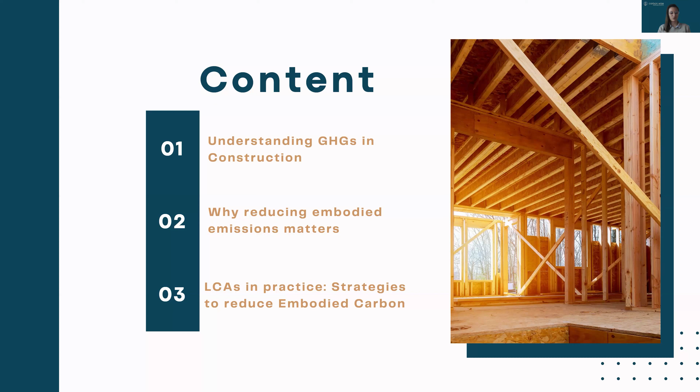So as you probably know, or have heard before, the construction industry accounts for about 40% of global greenhouse gas emissions. So you probably have seen a pie like this before, in some shape or form, and roughly 28% of those emissions come from operational emissions, so energy used in buildings, and 11% from embodied emissions, so that is materials, construction, and end-of-life process.

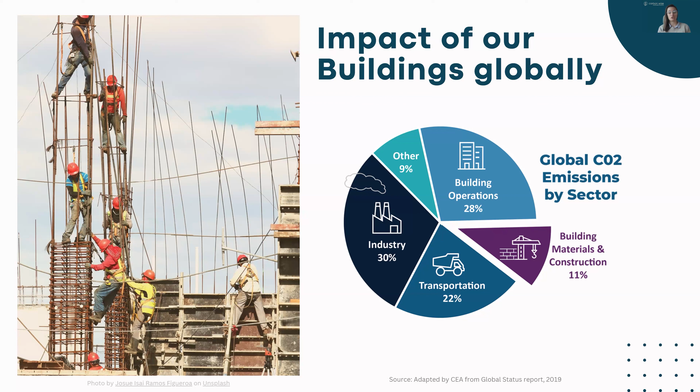Materials like concrete, steel, and insulation are major contributors to embodied emissions. And really, without intervention right now, emissions in the construction sector could double by 2060. So it is a good time for reducing both operational and embodied emissions. And it's very critical that we do this now if we are to meet our global climate targets.

So, like I was saying, there are different types of emissions throughout the life cycle of a building. The top 3 sources of operational emissions are fossil fuel space heating, domestic hot water heating, and cooking appliances. And that's basically during the building's operation, when fossil fuels are burned to heat the home, generate hot water, and cook. And those are called operational emissions. And that's where a lot of the energy efficiency policies have been focused over the past few years.

But another type of emissions that is often forgotten is embodied emissions. And they are associated with all the manufacturing, transportation, decommissioning of materials. And the top 3 sources of embodied emissions are concrete, steel, and petroleum-based insulation. We'll get a little bit more into this, but as a rule of thumb, any material that takes a lot of energy and effort to make will have high embodied emissions.

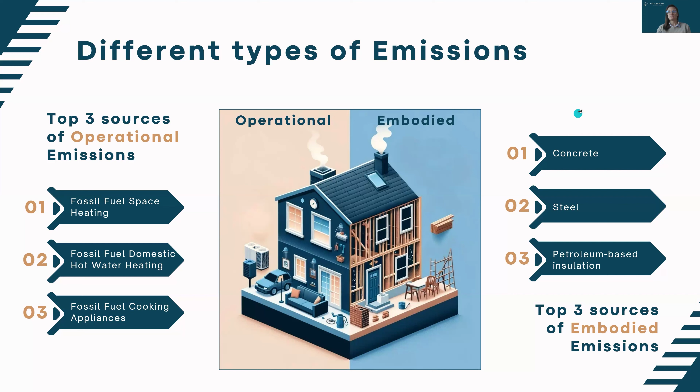So operational emissions are ongoing and can be reduced through energy efficient design and technology. But the important thing to know is that most of embodied emissions are emitted even before the owners move in, at the time of construction. And so those can be addressed through design strategies that we'll get into, sustainable material choices, and circular practices. We'll talk a bit more about that.

First, I like to always clarify the terminology embodied carbon, embodied emissions. I use them interchangeably, but I prefer embodied emissions because carbon could be a bit misleading. We are not only talking about carbon, we are talking about different greenhouse gas emissions. And the term embodied is really embodied in the processes. So embodied emissions are the greenhouse gas emissions associated with the materials and processes involved in the construction of a building or infrastructure throughout its entire life cycle.

So that includes emissions from extracting raw materials, manufacturing building products, transporting those materials to sites, the construction process itself, and then also the end of life, deconstruction and recycling of these materials. So what happens at the end of life of a building? Is the home getting demolished? Does everything just end up in the landfill? Does it get recycled, reused? And all of those streams have different emissions associated with them.

So you can see here that operational emissions in blue represent only one stage of the life cycle emissions. So historically, operational emissions have been really high, and that's why a lot of the policies have been focused on reducing operational emissions. And I think it makes sense, because operational emissions are more visible, because every time you turn on your furnace, you'll emit greenhouse gas emissions, for example.

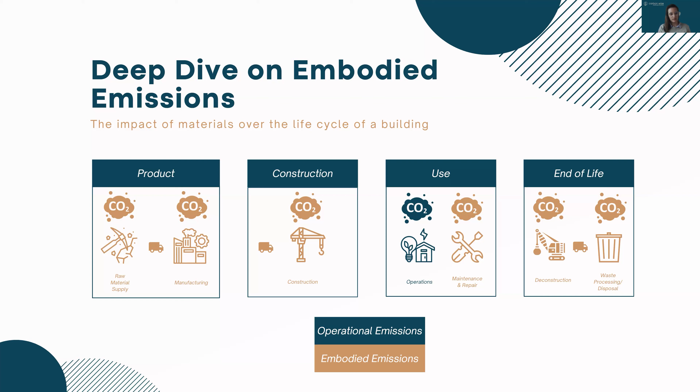But it's a bit less intuitive with embodied emissions because a lot of the emissions associated with the materials happen before or during construction. So once the homeowners have moved in, they don't really realize what went into building their house. So it's a bit harder for homeowners to grasp and to understand what are the choices that we can make that could have a better impact.

This is another graph to show the emissions quantified over time. So like I was saying, the upfront embodied emissions or embodied carbon are most of the entire life cycle embodied emissions, about 70 to 80%. So at completion of the house, a lot of greenhouse gas emissions will have already been emitted. And then come the operational emissions in blue, but those are now very low, especially in passive houses where we have reduced the energy demand, we are electrifying, we are using very little energy, and this energy is clean. So operational emissions end up being very, very low, which makes embodied carbon a bigger portion of the pie.

So addressing embodied emissions is essential right now when we want to achieve overall carbon reductions in the construction sector, because they have often been overlooked, but now we are getting a lot better at quantifying them through life cycle assessments. And I always say we can't reduce what we can't measure. So now that we get a better understanding of what they are, how to reduce them, and we can quantify them, it becomes easier to make the right decisions.

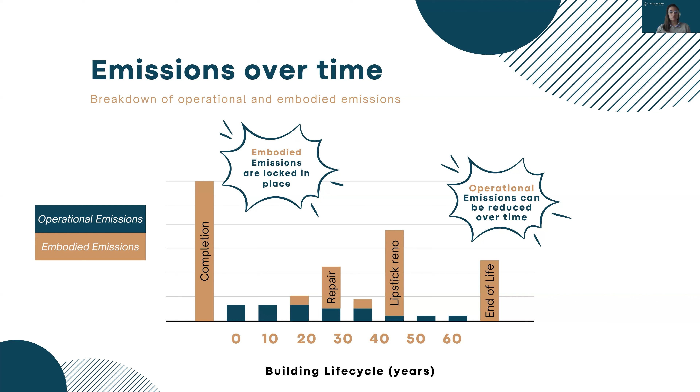And that's another way to visualize the entire life cycle of a building, with upfront embodied carbon, as you can see on the left side. So the A, production and construction stage, that's upfront embodied carbon, which is usually the highest. And then there's the B, use stage on the top right, and then the end of life C stage, on the bottom right. And I put in some key terms here. When we think about embodied emissions, we also want to think about circular economy.

It's linked, same as resiliency, in my opinion. We want to just build better, and that means a lot of different things, but including the words circular economy, material efficiency, waste reduction in the efforts towards reducing embodied carbon is important.

A lot of homes that we are seeing, for example, right now in Vancouver are being demolished for making space for bigger multi-units. And that's a good example of the end of life stage, where we can look at more circular principles and reuse those homes either as is, by just relocating the home, or deconstructing the home, taking the home apart, reusing some of those materials, and make sure that we reuse them in the next build, or we exchange them on the secondhand market.

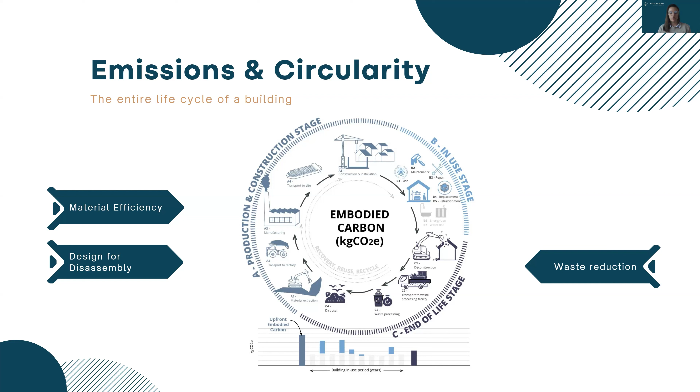So why do embodied emissions matter? I often say that it's a big elephant in the room. So first, because it becomes an increasing portion of emissions. As I was saying, operational emissions are going down globally, thanks to energy code, low emission grids, electrification, and the passive house concepts. We make our homes just much more efficient now than we used to 50 years ago. So operational emissions are going down.

But that could mean that we are increasing our embodied emissions, because we are building more infrastructure and materials, such as a new dam. If we are going to electrify all our buildings, we might need more. In BC, this is the case. Electricity comes from hydro. So we might need more infrastructure, more materials, and that might mean, though it's not necessarily the case, high carbon materials. And we're going to get a little bit more into that, and you'll probably learn a lot more about bio-based materials on Friday as well. So those are high carbon materials, often used in high performance homes now, but they don't have to be.

And then increased use of refrigerants. This is a topic that is becoming more and more front and center with the use of heat pumps. We are far from being experts on HVAC, but we do use more refrigerants, and there is a risk of leakage, and I'll get a little bit more into that.

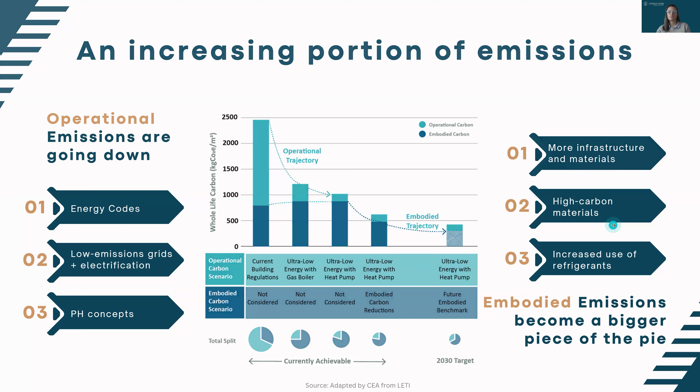Thicker walls might mean increased embodied emissions. And again, when we talk about this balance, that's where it comes in, because we do want to improve energy efficiency by increasing insulation levels and reducing heat loss in buildings. But that could significantly raise the embodied carbon if we use high carbon materials.

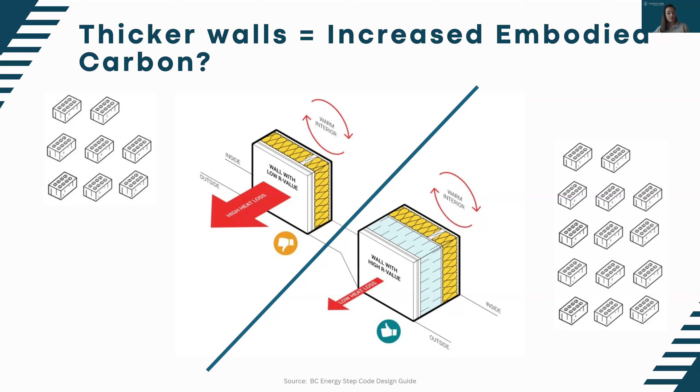Thicker walls also mean more insulation, framing, cladding materials, and they have a higher embodied carbon footprint from extraction, manufacturing, and transportation. So more of the high carbon materials is counterproductive, but more of the low carbon materials is a good thing. So that's why we need to explore low carbon materials and optimize design strategies to minimize embodied emissions while also maintaining energy performance.

There is a range of materials between the best of the best and the worst of the worst. And I always say it's about getting rid of the worst now and little by little moving on to the best options. So you have some examples here.

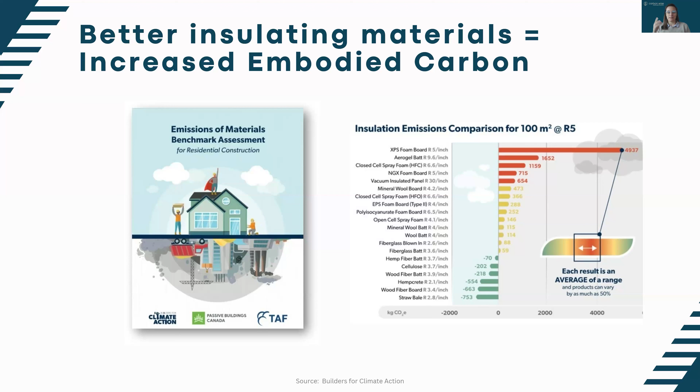And then, yes, increased use of heat pumps might mean increased embodied carbon from refrigerant leakage. So refrigerants used in HVAC systems and heat pumps are typically high global warming potential, GWP, such as HFCs. And so the global warming potential of these refrigerants can range from 100 to over 2,000 times that of CO2 over a 100-year period.

So when refrigerant leakage occurs during installation, operation, and decommissioning, the greenhouse gases can be released directly into the atmosphere. And for HVAC systems, refrigerant leakage is often the largest single source of embodied emissions. So even a minor leak can negate operational carbon savings achieved through energy efficiency systems.

So to mitigate this, it's important to start thinking about the design and material choices, so opting for systems using low GWP refrigerants like R32 or natural refrigerants like CO2. I'm curious about the group's experience, actually. We can get into this in the questions about having used some of those low GWP refrigerants, if anybody has first-hand experience. And also at the end of life, managing the equipment.

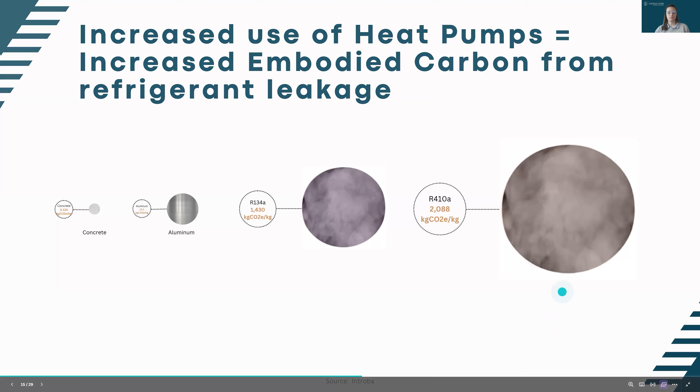Why we are talking a lot more about embodied emissions, and why it is important to address them now, is that they have often been overlooked, but that doesn't mean that they don't exist. So like I was saying, it's a bit harder to visualize where those emissions are coming from and what are the things that we can do to reduce embodied emissions. But it's also hard to keep someone accountable for them because there are no territorial boundaries.

So when we are building a house in Vancouver, but the materials come from China, is China responsible for those emissions, or are we responsible for those emissions because we are ordering those materials from there? And China having a lot of coal, their materials will definitely have a higher embodied carbon, plus the transportation, etc. So it's hard to keep someone accountable for those emissions.

And also we live in a world where everything is so available, right? We go to Home Depot and we can grab whatever material and it's right there on the shelf. We don't really think about where that is coming from, what's the process behind it. And this has made our life much easier because we can get everything we want right away, but we don't always think about where that's coming from and all of the process behind it. So it has also been overlooked because they were hard to calculate.

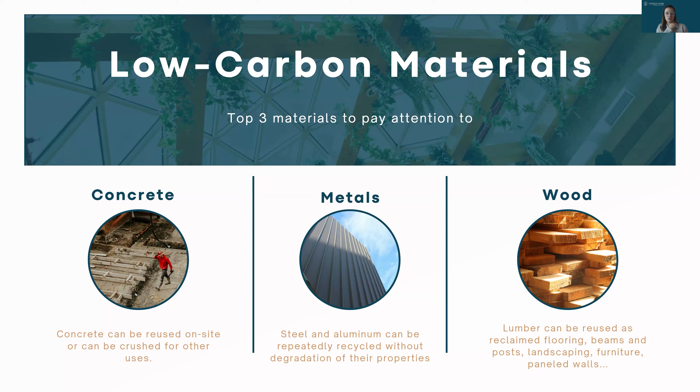And last but not least, the wood. Lumber can be reused. Right now in BC, we are not allowed to use lumber from deconstructed houses for structural elements, but there are still a lot of uses for reclaimed lumber. And that might vary from state to state in the US as well, what is allowed versus what is not allowed. But reclaimed lumber can be used for flooring, beams, fences, a lot of other things. And again, always thinking, can we use less material? Can we use less raw materials, and reuse as much from what we currently have?

Here are some strategies for using less concrete in practice.

We see for basement, and that is from the City of Nelson low carbon materials guidance strategies, which I recommend. I will share the link afterwards. They have a lot of great resources on in practice. What does that mean? Here are some solutions.

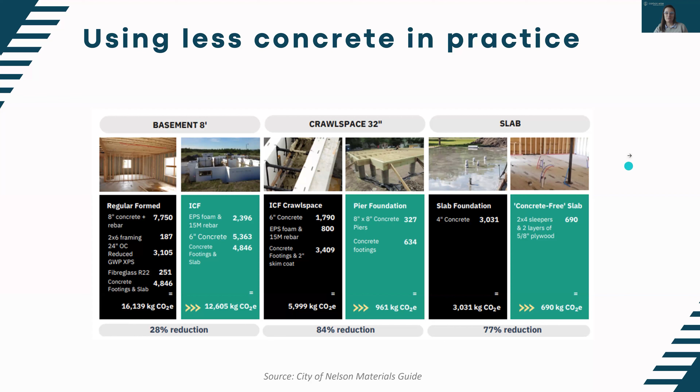Again, pier foundation, we have a couple projects right now working with pier foundation. This is great, just reduces the need for concrete. We want to move towards the concrete-free slab, but again, lots of challenges sometimes around moisture, and happy to chat about this afterwards as well if some of you have first-hand experience with that. And I'll be quick because I'm noticing we are moving with the time here.

Some low carbon insulation materials: wood fiber, cellulose, and straw. I am a big fan of wood fiber. I think wood fiber is the future. Lots of options to use wood fiber to replace existing EPS or XPS, which is a one-on-one replacement, makes it super easy to swap. Cellulose could be used in a lot of cases as well.

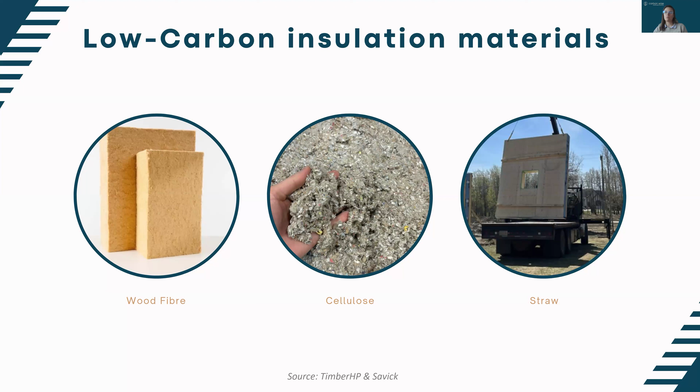In prefab walls, we see a lot of those right now. We have a lot of projects using cellulose. And actually the cellulose is going into our Phoenix House project that I'm going to talk about in the next couple of weeks. So these are materials that are available now. Straw, you'll probably talk a lot more about straw on Friday, but most likely used in prefab just because it is then built in a controlled environment versus on site. But again, something that we will see more and more in the future.

And I will just end the presentation with an example of the Phoenix House, which is a project we are currently working on. That is the project for which we won the Embodied Carbon Award earlier this year. And so not only it had very low operational emissions, that was an all-electric building. For those in BC, they meet step 5 and zero carbon step code. We reused the concrete slab, and in this case, that was 16 tons of CO2 equivalent that were saved.

So when we say using less concrete, that's the first conversation I had with the homeowners, and we had an integrated design process very early on, spent 3 hours with the homeowners, discussing their vision for this build. They had lost their home to a fire, and they are rebuilding their home, and they really wanted to make it long lasting, a multi-generational home for their family with a suite to have multiple family members.

So these were people who really wanted to do the right thing, and right away we talked about, well, there is your home, even though it burned, and some of the wood can't be recovered because of that. Some wood still got recovered and is being reused for fences and forming and a lot of different things that are non-structural. But then, well, you have a concrete slab, so why don't we just reuse this concrete slab? It's there, it's in good condition, it has been approved by structural.

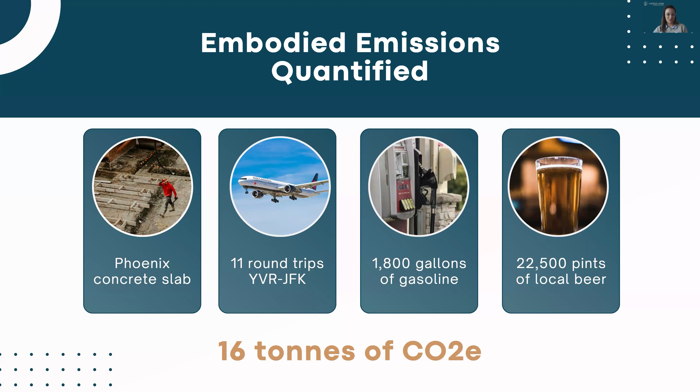But what I want to say is that this is achievable today with the materials that we have today, with the techniques we have today, and it's about being creative and having those discussions early on in the design phase, versus too late when it's already under construction. So everybody was on board.

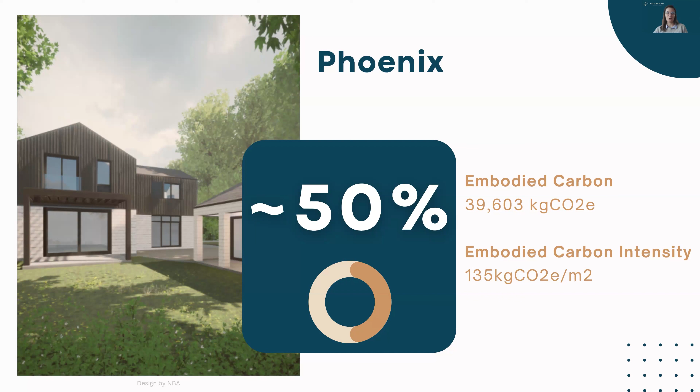This project is being filmed for a documentary. We will be sharing a lot around the decisions, why those materials versus others, the whole construction process. The homeowners are taking this initiative to the film and the documentary themselves, and we have support and sponsors. This has become a next level project for us, but really in terms of carbon, this is what we can and maybe should all be doing now. So just want to say that this is very doable. We are doing it, and you'll hear a lot more about this on the Phoenix House website and documentary.